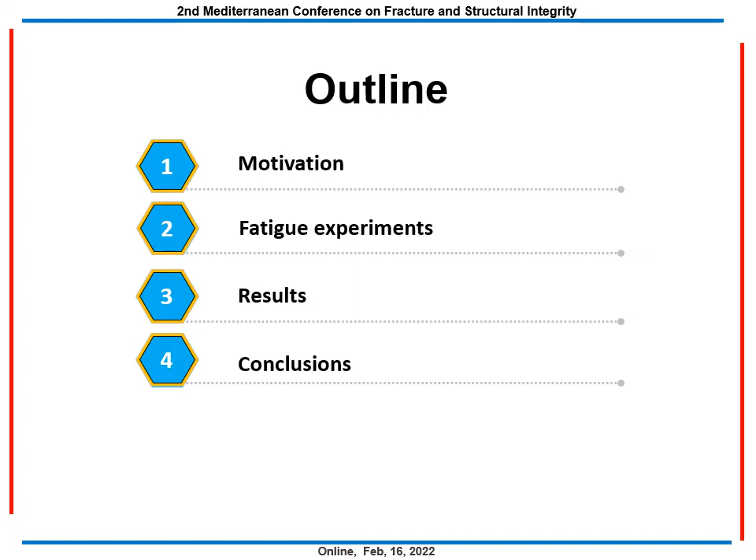This talk includes four parts. The first is about motivation, the second is the fatigue experiment details, and the third is the test results. Fourth is the conclusions.

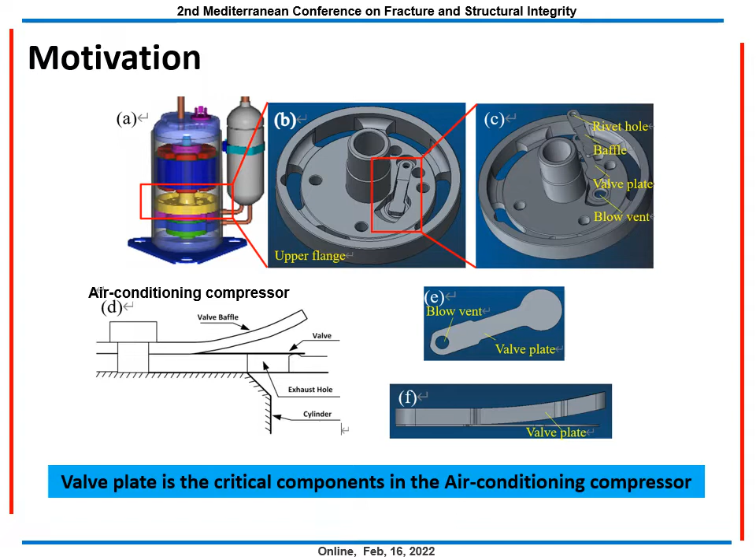During the operation of the compressor, the valve plate will be subjected to cyclic impact and bending loading in the air conditioner. So the valve plate is a critical component in the air conditioning compressor. According to the statistical analysis of the component in the air conditioning compressor, the cycle number is larger than 10 million cycles. That belongs to very high cycle fatigue under cyclic bending. The valve is made of martensitic stainless steel.

So the problem of the valve plate is that there is not enough fatigue data for very high cycle fatigue under different loading conditions, including the orientation of the extracted specimen. So our purpose in the study is to get the very high cycle fatigue property of martensitic stainless steel.

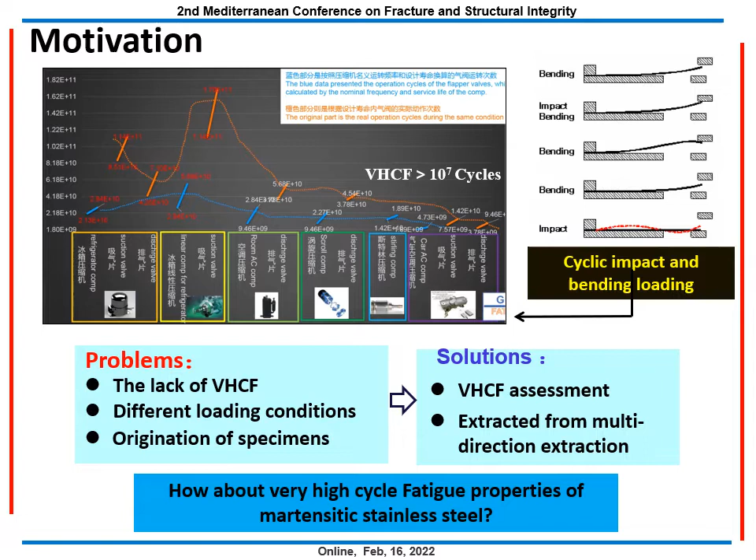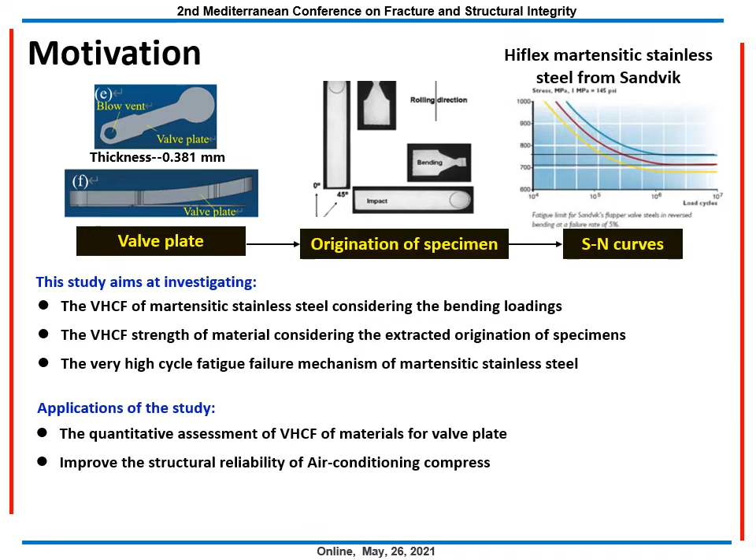So we can have some applications of this study in the future. The first one is the quantitative assessment of very high cycle fatigue of materials for the valve plate. The second is to improve the structural reliability of air conditioning compressors.

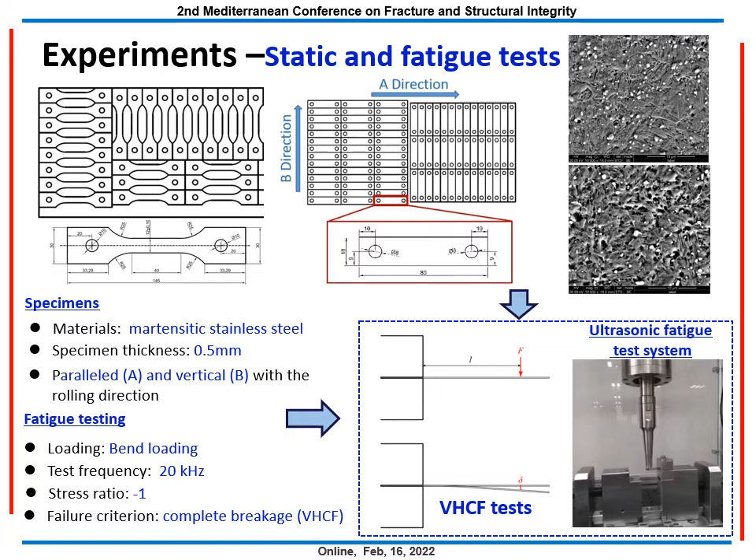So this is about the details of the specimen and the fatigue test. We extracted the specimens parallel and vertical to the rolling direction of the material. In the fatigue test, the loading is a bending cyclic loading, the test frequency is about 20 kHz, the stress ratio is negative 1, and the failure criterion is complete breakage.

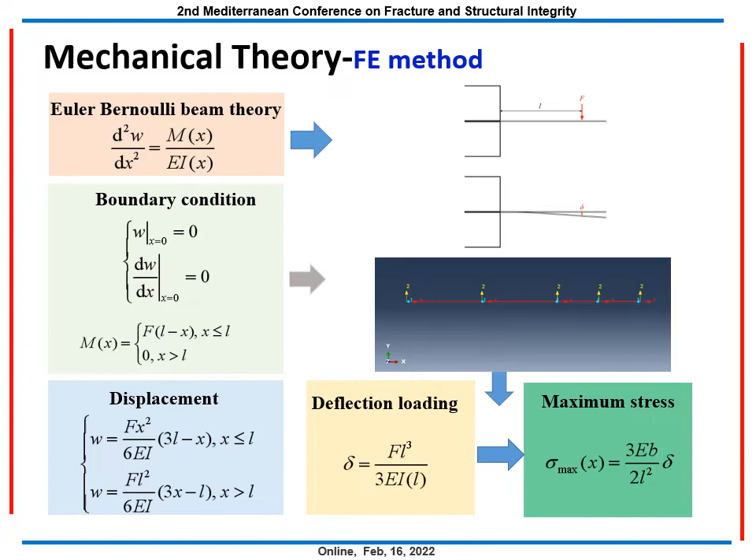So, in order to simulate the processing of the fatigue, the ultrasonic fatigue processing, we use the Euler-Bernoulli beam theory, and combining with the boundary condition and the displacement, we can get the deflection, loading, and the maximum stress.

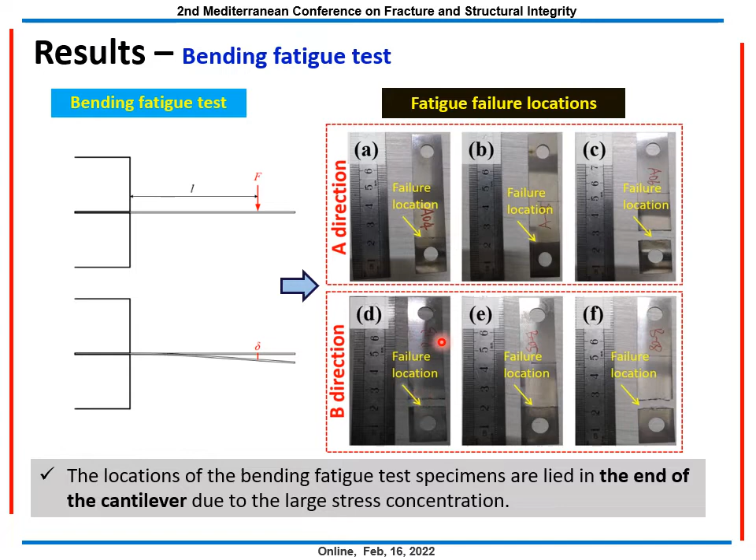According to the simulation and the result of the bending fatigue test, we can see that the fracture location lies at the end of the cantilever due to the larger stress concentration for this specimen. According to the simulation setting in the ABAQUS software, the elastic modulus will affect the vibration of the beam's mechanical response. So different elastic moduli were employed to calculate the stress vibration at the beam's fixed end.

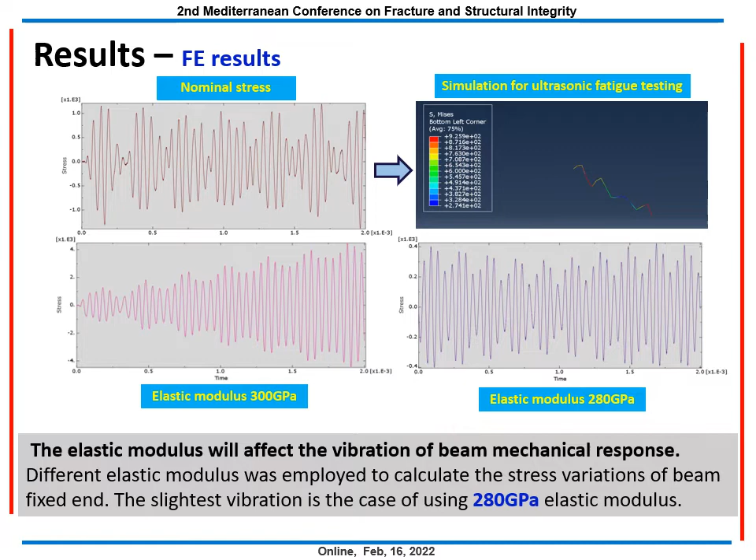The slightest vibration is the case using 280 gigapascal elastic modulus, according to the actual stress response. Then we can get the S-N curves by the static calculation method and the dynamic method. According to the results, there is no difference for the specimens with two different directions.

Comparing B and D, we can see that the S-N results by the static calculation method show more dispersion for the test data of fatigue life than those calculated by the dynamic method.